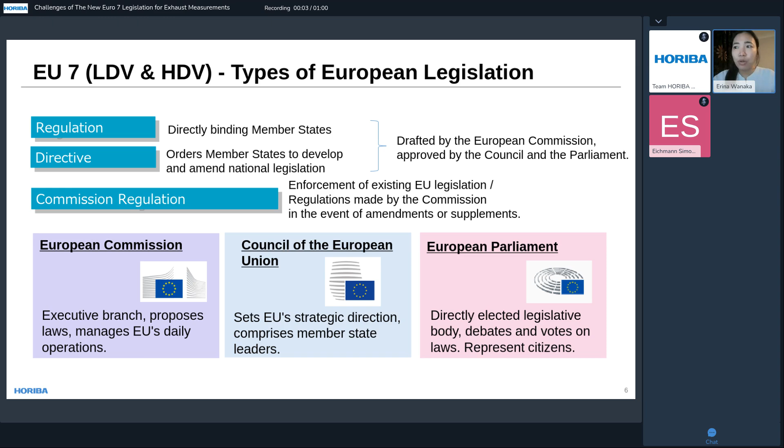So before we get into the actual contents, I'm going to talk about the Euro 7 overview. Before we get into the actual details of Euro 7, I'd like to quickly show you the big picture of how the EU legislation works. So EU 7 is shaped by three main EU bodies, one of which is the European Commission, who's there to lead the whole process. It drafts the proposal and drives the work forward. Then the proposal is discussed by the European Parliament and the Council, who introduce their positions before the final regulation is agreed. So this slide is basically to set the scene, to understand who's involved and how Euro 7 becomes a law.

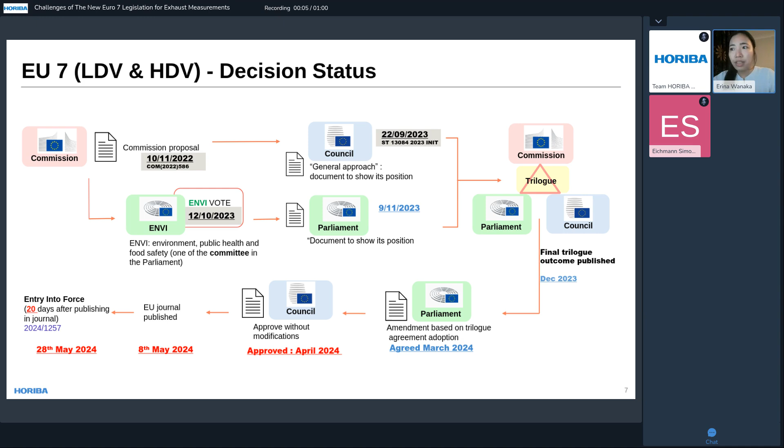So this slide summarizes the Euro 7 decision timeline. The proposal was first issued by the Commission in 2022. Then that was discussed in the Council and the Parliament during 2023. Later in 2023, that got passed through to a trilogue where the three main institutions came together at one table to reach an agreement. Finally, the text was published in the official journal on the 8th of May, 2024. 20 days later was the entry into force date on the 28th of May. So the key point here is that Euro 7 is now legally in force and the framework is fixed, meaning the direction and overall timeline was set. The details and test procedures will be defined at a later stage, but at that point, the framework has been set.

So what happened after that, based on the official journal of 2024? I'm going to start off with the facts first to set the baseline, and then move on to what that actually means in practice. Since the adoption of this official journal in 2024, the first set of milestones came in September 2025. This first set of implementing regulations was 2025/1706 and 2025/1707. They were published to cover the exhaust emissions, OBFCM, and OBM, both including the emission limits and test procedure for light duty.

And then the next phase, covering battery durability, brake dust, tire abrasions, and low temperature ranges for BEV, is expected around the second quarter of 2026. Then Euro 7 will apply to new vehicle types from November 2026, and a year later to all new vehicles from 2027. For tires, it's coming out at a later timing, starting to be applicable from 2028.

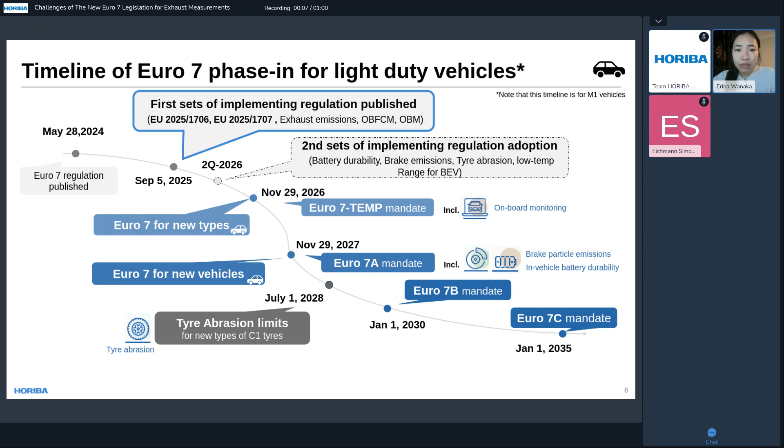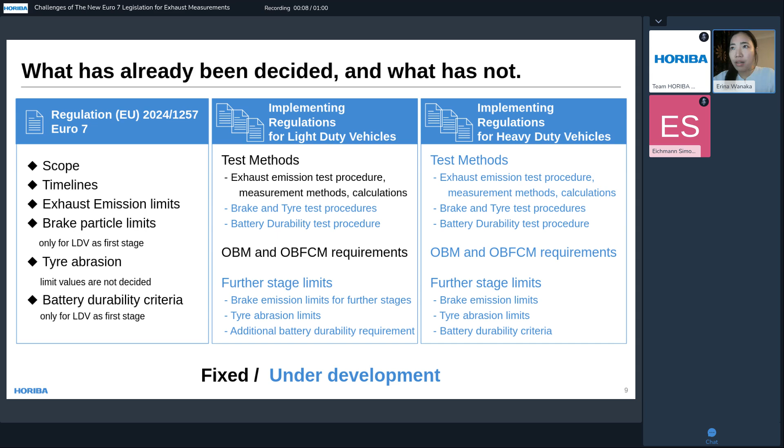So in terms of context, what has already been decided and what's still under discussion - the black parts are the ones that's already fixed and are in the first set of implementing acts, and the blue parts are still under development. For light duty, the brakes, tires, and battery durability are still being discussed, called the second phase. For heavy duty, most of the contents are also still going to be discussed.

So I have borrowed this slide from the latest AGVES meeting, which shows you the Euro 7 light duty transposition activities from the UN regulations. It basically maps the Euro 7 light duty requirements to the relevant UN ECE regulations where they're being implemented. For light duty, many of the key elements are already progressing, and you can see which requirements are linked to which UN regulations, like 154, 168, and 177.

So these corresponding UN regulations were part of the package that got passed through to GRPE in October, and now is expected to be voted at WP29 in March 2026, for that to be finally adopted and then referred to by Euro 7.

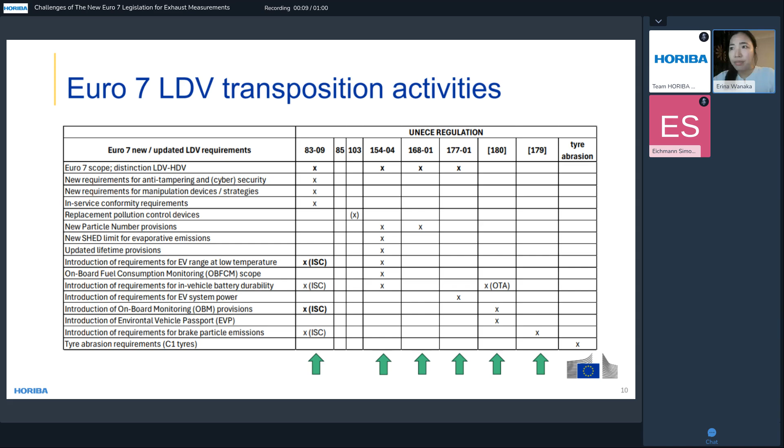So that was the overview of light duty so far, and the timeline of heavy duty currently looks like this. The first set of implementing regulation will be adopted around the start of the light duty type approval testing, which is on November 2026. Then the second set will be coming in before the application date starts for heavy duty, which is on the 29th of May 2028.

A year later, following a similar trend as light duty, will be the new vehicles, and similarly, the tire abrasion limit for C3 tires is expected to start around 2032.

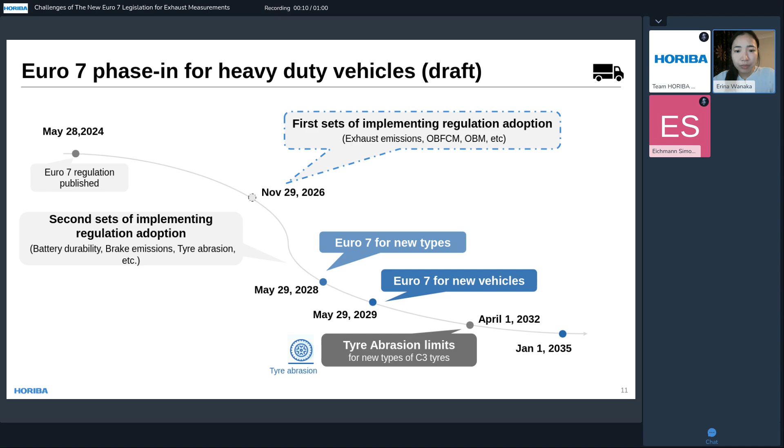In terms of the requirements for heavy duty, what we know so far is that the heavy duty emission measurement system will be referred to UNR 49. But the new requirements, which I'm going to talk about later, like NMOG and N2O, will also be added to UNR 49, and we expect this to be set around November 2026. Then they will move on to the second phase, but we'll discuss the details in later slides as we find out more.

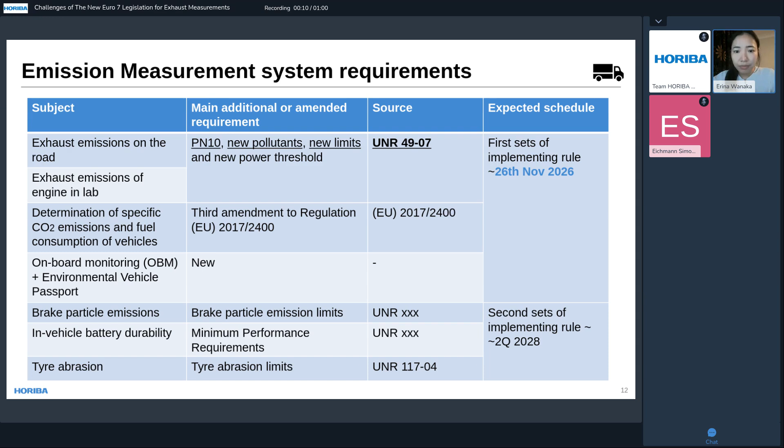So that is it for the overview. I'm now going to move on to the light-duty vehicles requirements, starting off with the Euro 7 exhaust emission limits.

As you can see, most of the numbers here are pretty much the same as in Euro 6E, except for the particulate number limit - PN10 is going to be regulated instead of PN23. Additionally, under Euro 7, all gasoline vehicles must meet the PM and PN limit, which was previously only applicable for direct injection positive ignition engines.

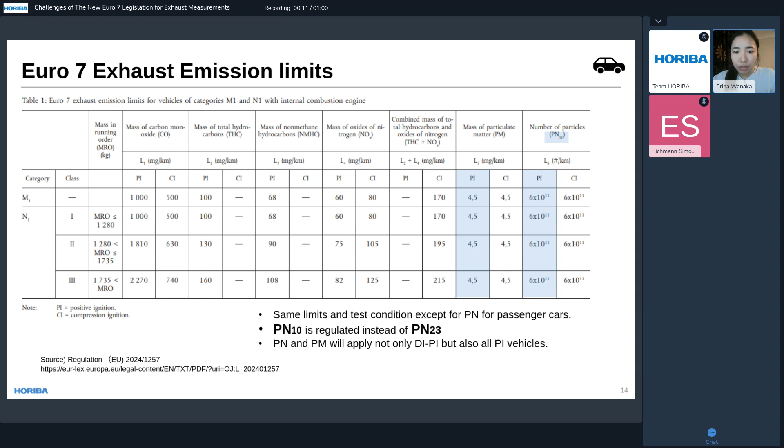So that's the laboratory. Now what is the situation in the RDE? I'm going to use the pointer here. So what it says in the regulation at the moment is to refer to Regulation 168. What it says in Regulation 168 is the NOx and PN limits would look pretty much the same as Euro 6E. However, there are still not yet specified limits for CO, THC, and THC plus NOx.

As a result, we are seeing different interpretations from the Commission and some of the OEMs. The Commission's view is that if it says 'not yet specified,' the limit will be defined at a later stage, while some OEMs interpret this as meaning there is no immediate obligation to measure. Our understanding is that NOx and PN will be carried over from Euro 6E.

Whereas CO and THC is where further clarification is still expected. However, in parallel, we understand that compared to when light-duty RDE was first introduced in 2009-2010, today's vehicles are far more hybridized. Because of this, the Commission has raised concerns about potentially elevated levels of THC, and they have already started doing some background testing.

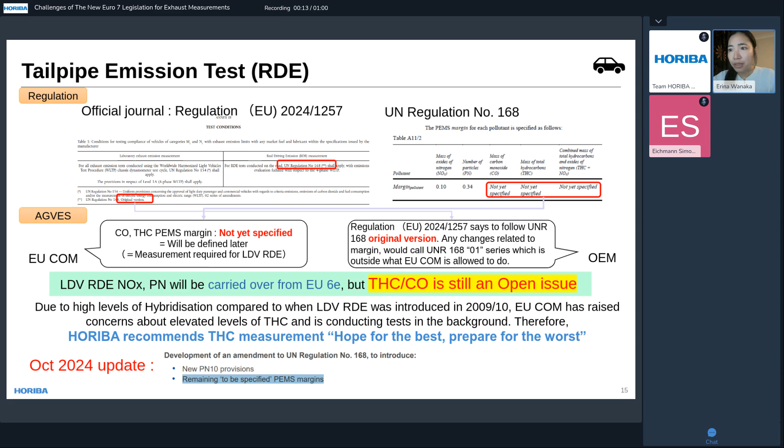So while the legislation is still evolving, our message here is that we highly recommend starting to build the actual evidence now. We'll of course keep you updated on how things develop, but we encourage that OEMs should be able to monitor their CO and THC data, so you can be ready to respond quickly once the limits and the compliance approach are finalized.

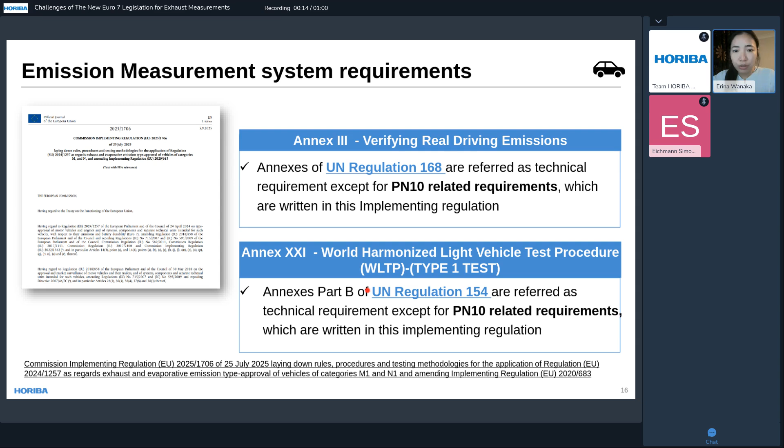So we have gone through the limits. Where can we find the test procedures? At the moment, the real world driving emissions requirements are currently written under Regulation 168. The laboratory testing is under 154, with the PN requirements currently written under the EU implementing regulations. However, the plan is to write this specification into UN 168 and 154, so that the European regulations only have to refer to the UN regulations.

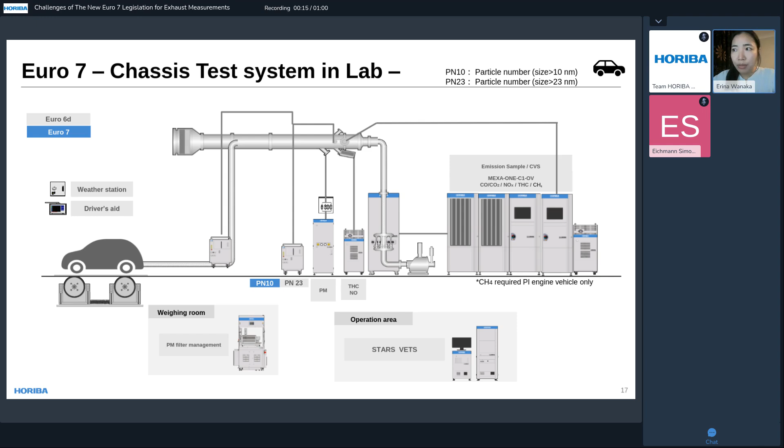Then moving on to what that test system looks like in the laboratory. This slide shows you the changes of the exhaust emission test system for Euro 7. As you can see in the center, the PN10 devices should be added for Euro 7, but other items would remain pretty much similar to what we already had for Euro 6E. Simone, after that, we'll be discussing the technical details on this part.

Also, what that also means for RDE is that we don't expect to see any changes regarding the gaseous emission limit, which is following Regulation 168. But regarding the PN limit, a new device to measure that is also required. Again, Simone will be talking about the details in her slides.

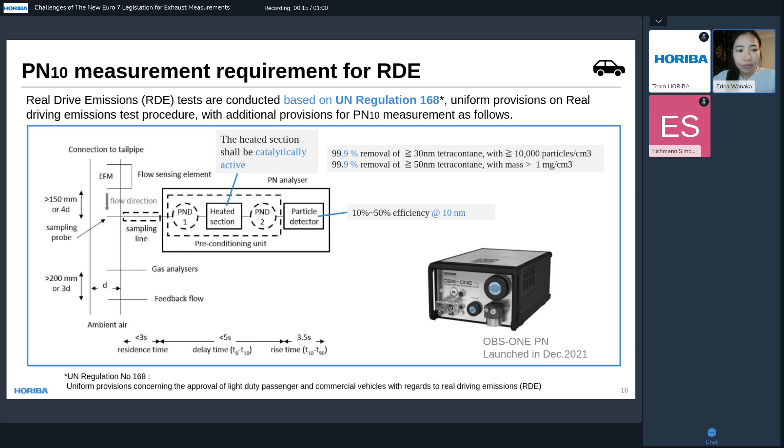So far, we have taken a look at the limit and the test procedure. Building on from that, we'd like to move on to the underlying principles. Hopefully this is going to be leading on to some good news.

As mentioned earlier, the Euro 7 RDE method refers to Regulation 168 as the basis of the measurement. Under this Regulation 168, a list of standard analyzers is described. At the same time, Regulation 168 also allows the use of alternative analyzers, provided that they demonstrate equivalent or better performance and are approved by the testing authority. With that context, following the necessary work, I'm very pleased to share that the Vehicle Certification Agency has approved our MEXAcube as an alternative analyzer for light-duty certification testing, giving you an additional compliance option for RDE measurements.

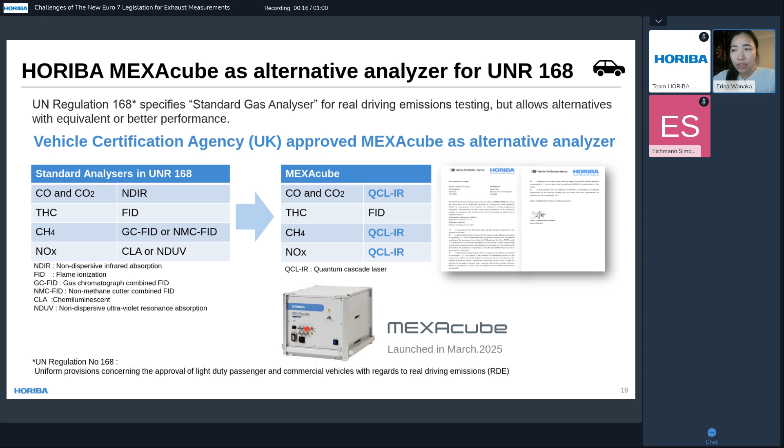Okay, so that was the first part, or first set of implementing regulation released in September 2025. There is another set of implementing regulation that's been released that talks about the OBM requirement. So OBM is trip-based: you start the propulsion system, you begin the OBM trip, switch it off, the trip ends.

After that point, the vehicle updates the monitoring status of NOx and also for PM. If either of them reaches the error status, the driver warning system has to alert the driver. At that same end-of-trip moment, the vehicle also creates the data record—the distance-based NOx for that trip, plus supporting parameters like energy or fuel use or battery state of charge. It also generates a hash value so that the record can later be checked for integrity.

Then this record will be made available in two ways: it is sent over the air when connectivity is allowed, and it also must be accessible through the OBD port. So the message here is that Euro 7 adds trip-by-trip evidence that the emission control can stay healthy in real use, not just in the laboratory.

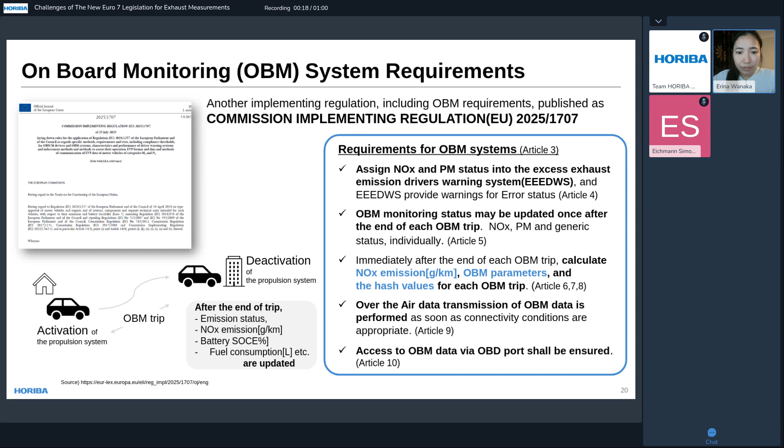So how is this OBM checked? During in-service monitoring, or in-service conformity, the NOx value reported by OBM is compared against the reference NOx measured by the approved emission system. Beyond this individual test, overall performance is also judged through the OBM dataset submitted for market surveillance, to see how the system behaves in real use.

Importantly, the regulation also includes a value limit: the OBM NOx value must not be more than 30% below the measured test value. So technically, this requirement is driving more OBM development work, and at the moment we're seeing growing interest in analyzers such as MEXAcube to calibrate and validate the OBM system. This is also an area where Simone is going to be talking to you about the details.

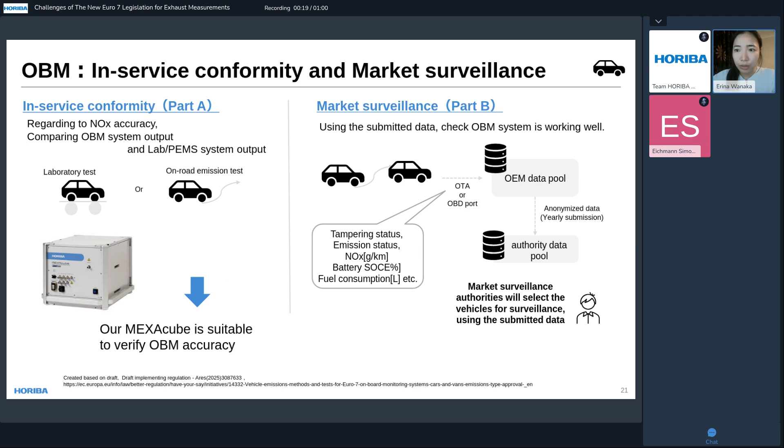Okay, so that covers the first phase of light duty. I'm going to move on to the second phase from here. One of the new requirements here is the brake particle emissions.

At this stage, only a particle mass emission has been defined. This is going to be reviewed over time, with the revised table expected to arrive around 2030 and then also 2035. But the final limit for light duty is fixed for all types of vehicles as 3 milligrams per kilometer per vehicle.

In terms of the test procedure, it is based on UN GTR at the moment, but a transition to UNR 179 is expected. The regulation itself also defines the measurement method for all of the indicators, that's PM10, PM2.5, and TPN, which all require to be reported.

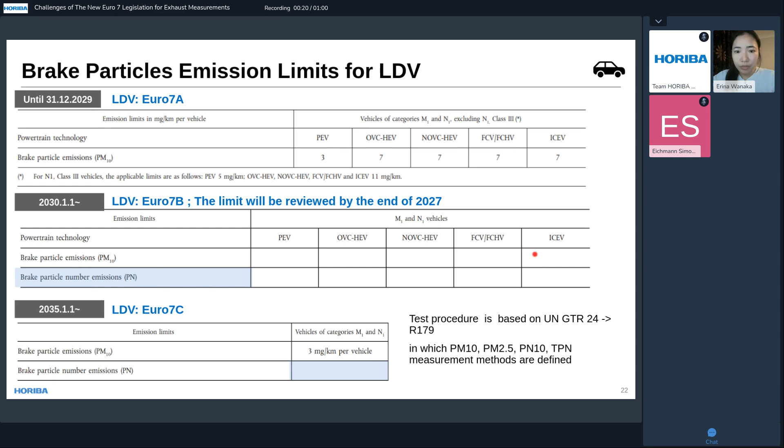For the tire versions, at this stage, the limit table looks blank and has not been finalized quite yet. In terms of the test method, that's also currently being looked at, at the UN level. But yes, the intention is to use that UN regulation once it's been enforced.

As for the timing, C1 tires, the passenger car vehicles, are applicable from 2028. C2 tires, the commercial vehicle tires, from 2030. C3, the heavy-duty vehicles, from 2032.

Moving on to battery durability, Euro 7 introduces a new durability requirement. At this stage, what has been decided is the durability requirement for light duty covering up to 8 years or 160,000 kilometers. In terms of the assessment method, the evaluation approach is defined under UN Global Technical Regulation 22, where again they are discussing transitioning that over to the UN regulations.

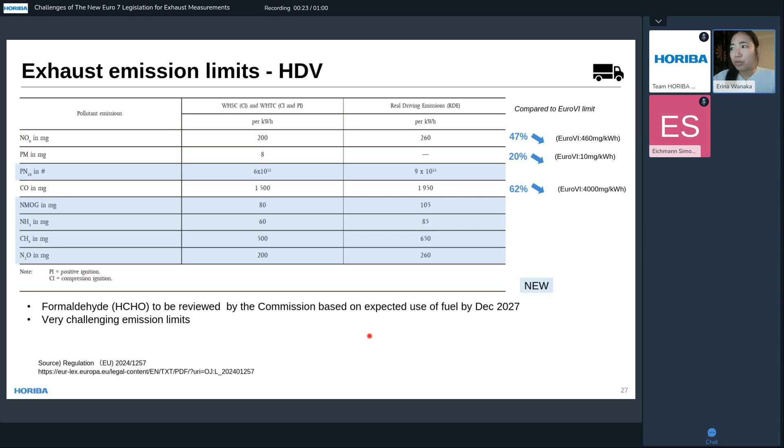It also adds NMOG, ammonia, methane, and nitrous oxide. Formaldehyde, on the other hand, the value is not yet given, but the Commission is currently under review to decide whether to set a specific limit for formaldehyde, and that's going to be decided before the end of December 2027.

One of the new components, as I've shown you in the previous slide, is the NMOG. There is a definition in the Euro 7 language, but the calculation formula is not finalized yet.

However, there are two candidate formulas. One of which is the formula used by the US EPA, and it uses the alcohol and aldehyde values that are sampled by the impinger or cartridge, and then measured by gas chromatography.

Another possible formula is the EU original one. This method uses the formaldehyde values and the values related to the fuel property.

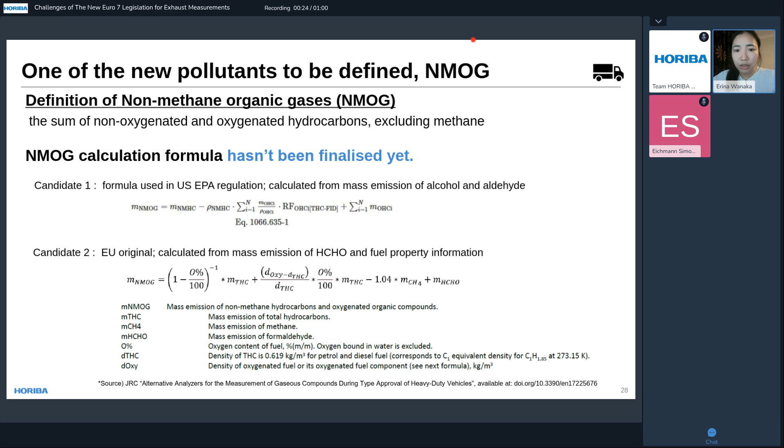So the measuring principles - you may be looking at this slide thinking it's very different from light duty, but the main message we want to get across today is that QCLIR technology is a compliant method in the regulation, and we are doing the final work to make that 100%.

As mentioned earlier, the emission measurement method will follow the UNR regulation 49 series, and the amended regulation to include this QCLIR technology has been voted on in WP 29 in November 2025. In this draft, QCLIR is included.

However, there are some conditions for alternative analyzers. For example, this has to be type examined by the Metrological Institute, technical service, or type approval authority, and it will also have to be compliant with CEN. We are planning to have that ready by the end of this year.

It's not a topic today, but we also have the same text in Regulation 96 for non-road, for those of you who are interested in non-road. So we also have that assessed and appraised for non-road as well by the end of this year.

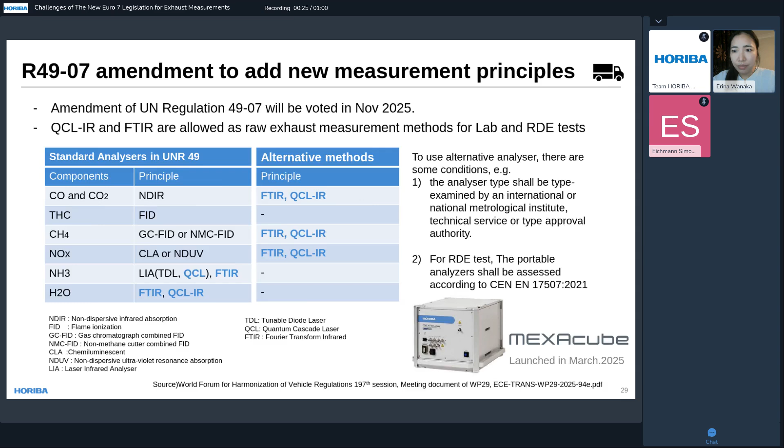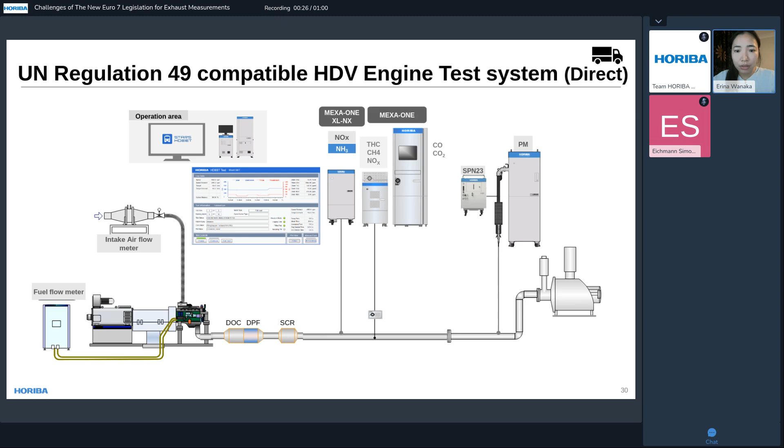What that test system looks like in the test schematics - this is what it used to look like in Regulation 49, the current version. One example of Euro 7 measurement would look like this, with N2O measurement, formaldehyde, and SPN10 as new components.

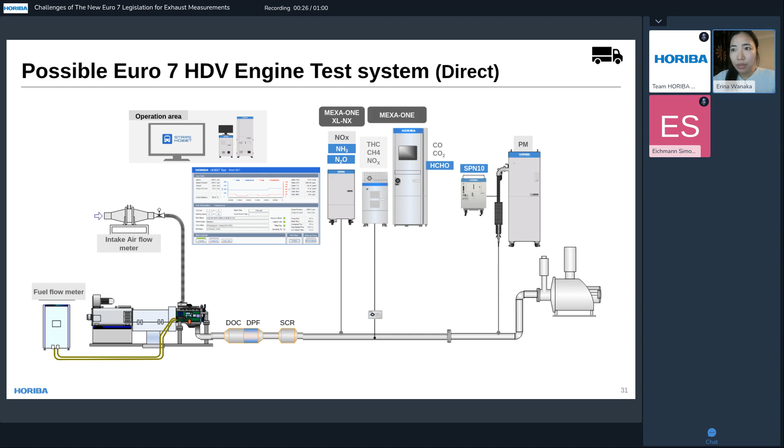For heavy-duty brakes, it is expected to have the limit set by the end of 2027, looking at how things go with also the light-duty as well.

There was an interesting discussion I'd like to talk to you about in the latest AGVES advisory group on vehicle emission standard discussions. It highlighted a mismatch between the vehicle level limit and the aftermarket reality. Brakes are typically replaced by axle, and rarely would the front and rear be replaced at the same time, whereas the Euro 7 limit currently defines the brake emission limit at a whole vehicle level.

So it was discussed that this created technical uncertainty for the aftermarket, including a significant increase in the brake family, high test burden, and wide variety of original equipment front and rear emission ratios. To address this, a proposal was discussed to ensure any combination of original equipment and aftermarket brake components would still have to be compliant with the vehicle level brake emission limits, but the details are still to be discussed in upcoming meetings.

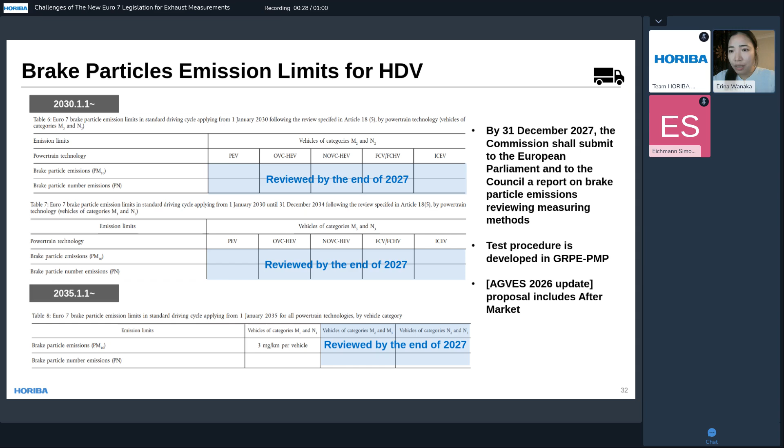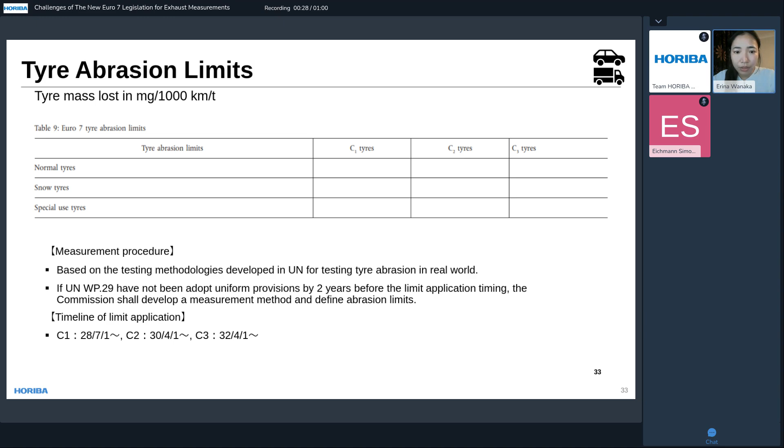The tire abrasion limit situation is still behind light duty, whereas in heavy duty it's starting around 2032. The technical details of battery durability will also be defined later.

Looking ahead to the new Euro 7 elements - battery durability, brake emissions, and tire abrasion - I'm going to talk to you a little bit about our solutions. The evaluation method is coming very close to being finalized for light duty in the UN regulations. For battery durability, the challenge is running repeated drive and charge cycles on the chassis dynamometer without consuming excessive engineering time. This is where our automated robot could potentially help, by running the battery consumption sequence with consistency and efficiency.

For brake emissions, Horiba Germany already has a compliant test facility, so we can support you with some contract testing as well, if that would be useful. Tire abrasion is still under active development, and we are also involved in both the regulatory drafting and the testing activities. I won't go into the technical details today, but we are more than happy to support whatever need, whatever questions or requirements you've got, and we can cover that in later discussions.

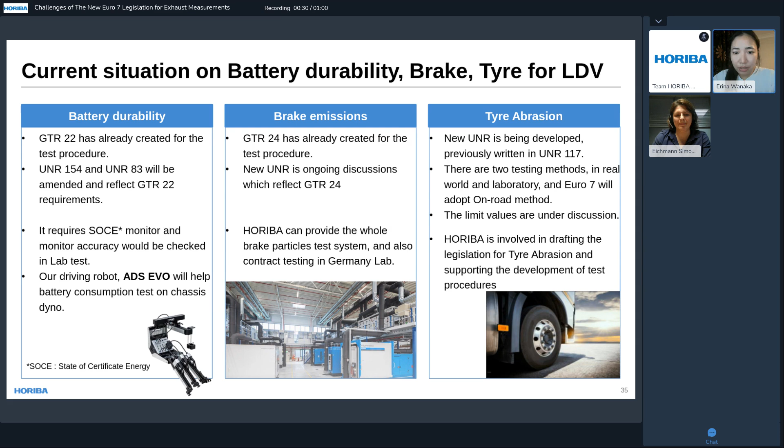So this will be my final slide for the day. To wrap up, for light duty, the first Euro 7 implementing package is already published.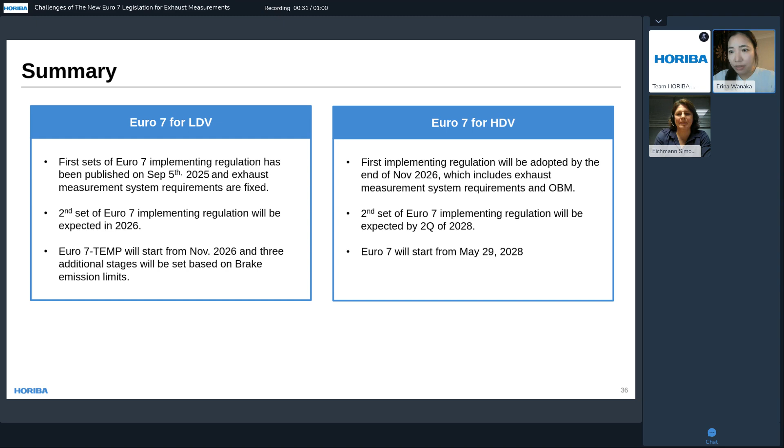For heavy duty, the detailed implementing rules are still being developed. The base regulation requires the Commission to adopt these implementing acts by 29th of November 2026. Then it will be applicable for Euro 7 from the 29th of May 2028. So with that context, I'm going to hand over to Simone to share some practical insights on the technical side.

Thank you very much, Erina, for this really broad and deep overview of the new requirements of the upcoming Euro 7 regulation. In the next part, I will talk about the solutions HORIBA offers to help you fulfill these requirements. Here on this table, I summarized the components which are regulated currently in the Euro 6e regulation for light duty and heavy duty, and compared them with the components which will be regulated in Euro 7, also for light and heavy duty. When we compare this to the regulation, what is new?

Ammonia needs to be measured as mass. N2O was added. Basically, THC and non-methane hydrocarbons were replaced by NMOG and CH4, and as Erina said, formaldehyde will be reviewed again in 2027, but will be needed anyhow for the calculation of NMOG, meaning non-methane organic gases. When we look at particle measurement, PN23 was replaced by PN10, so smaller particles will also need to be monitored.

Okay, what are our solutions for that? Of course, you can measure the...

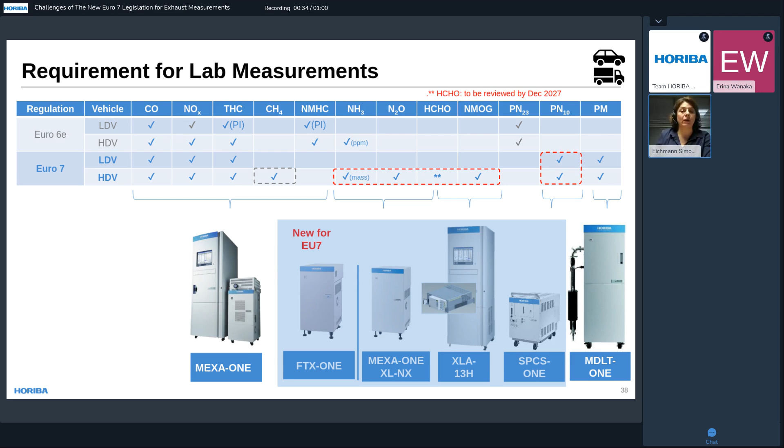For particle measurements, we upgraded our SPCS-ONE particle counter to measure also smaller particles. I would like to go now a little bit in detail on the specifications of the analyzer, basically starting with particle measurement. As I said, we have upgraded our SPCS-ONE to measure also smaller particles, starting from a particle size of 10 nanometers. The measurement principle is still a condensation particle counter.

We use a hot catalytic stripper for volatile particle removal with an efficiency of more than 99.9%. The counting efficiency is bigger than 90% for particle sizes of 15 nanometers and higher. You can use the unit for ambient conditions of 5 to 30 degrees Celsius for standard configuration. If you use an additional cooling unit, you can even go up to 45 degrees Celsius, and for altitude use, up to 2000 meters.

We have several options available. First, single unit - we still have available a PN23 unit, but you can also have a single PN10 unit. It's also possible to upgrade a current particle counter to PN10, so you don't have to buy complete new equipment. In addition, we offer a dual unit, which includes 2 particle counters, one for particle sizes from 10 nanometers and one for particle sizes from 23 nanometers. Both measurements are done simultaneously.

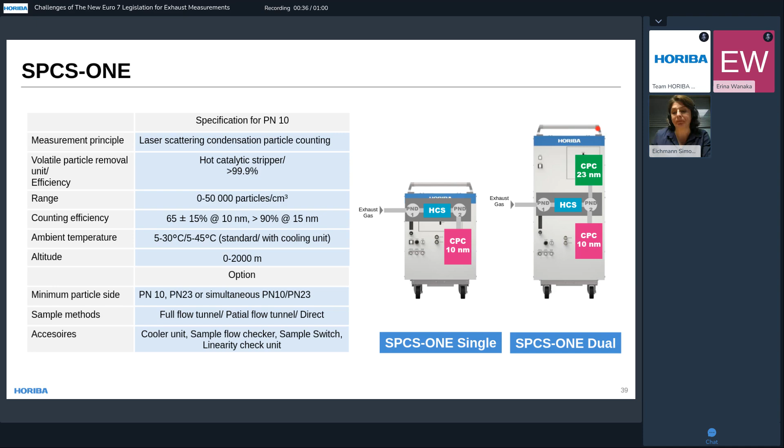Okay, now I would like to switch to the gas components, but before that, I want to highlight a little bit the difference between both technologies and the pros and cons, to help you find the proper technology. In principle, QCL and FTIR are based on the same physical background - they both use the absorption of infrared light from the different gas components, and the wavelength of the absorbed light is unique for a certain species. That means you can detect one component selectively in a multi-component gas mixture. The amount of absorption is related to the concentration, so you can get a concentration value out of that.

What is now the difference between both technologies? I would like to start with the Fourier transform infrared technology, FTIR. This technology is really able to detect a very broad wavelength range with a single setup, and this allows the detection of several molecules like CO, N2O, CO2 with one single setup. But you also see that you have some overlap between the signals, which can be partly compensated, but typically you have to consider some residual interferences of 1 to 2 ppm, depending also on the component.

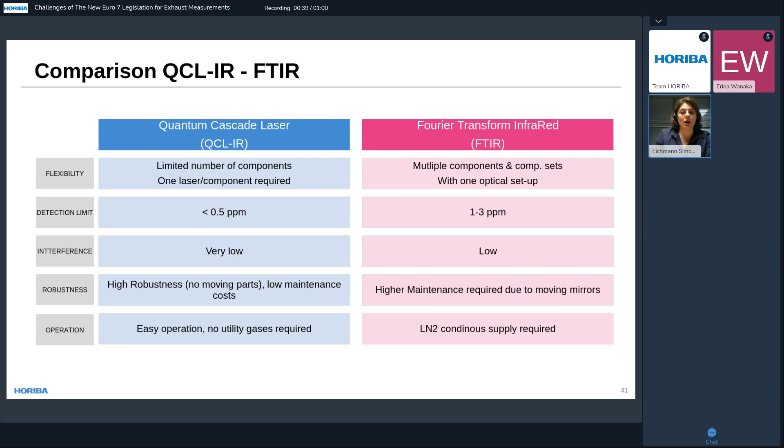Okay, now I would like to start to introduce you to our FTIR-based analyzer, the FTX-ONE family. We have basically 3 options. One is the FTX-ONE-CS, the compact version, which includes an FTIR with the possibility to measure simultaneously up to 28 components. We have the possibility to add up to 6 component sets for different fuels. The analyzer operates at 5 Hertz and is compliant to the UNR 49 stage 5 and the GTR 15 regulation for ammonia.

In addition, we have the FTX-ONE-RS available. That also includes an oxygen and a THC measurement with an FID. Both the FTX-ONE-CS and the FTX-ONE-RS are for direct measurements. And in addition, we have the FTX-ONE-CL available. It's a diluted analyzer with compliance to EPA 1065 and 1066.

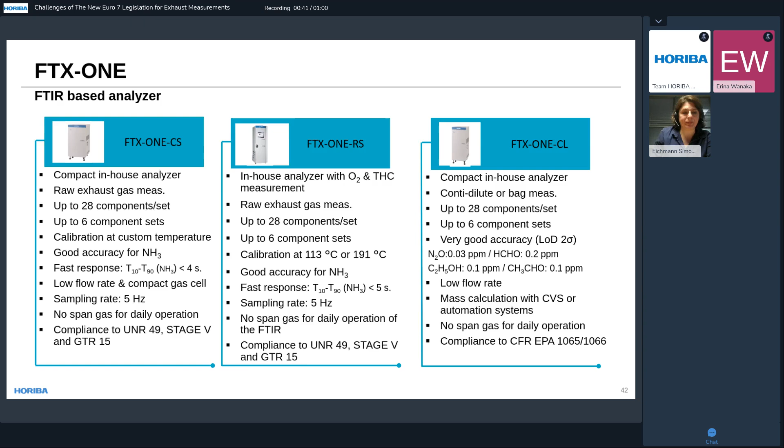Okay, now I would like to switch to our QCL-IR-based analyzer. One unit is the MEXA-ONE XL-NX, which measures beside NO, NO2, also N2O and ammonia. You can use it for raw as well as continuous diluted measurement. It has a time resolution of 10 Hertz and the detection limit of 0.2% full scale.

which means between 0.2 and 0.4 ppm, depending on the component. It is developed for temperatures of 5 to 40 degrees Celsius and compliant to the EPA 1065 regulation, the UNR GTR 15 for ammonia, NO2 and N2O, and the UNR 49 regulation. Currently, we are ready for ammonia. For additional components, we need to wait till the regulation is finalized and we have the type approval, which is required. It's also compliant to Chinese regulation as well as stage 5 for non-road mobile machineries.

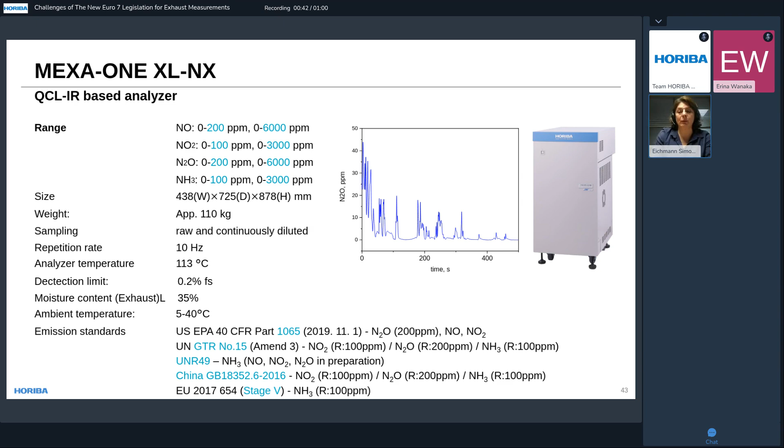Okay, for formaldehyde, we have also a QCL-IR-based analyzer available. That's a 19-inch rack analyzer for implementation in MEXA-ONE. We have ranges there of 20 and 100 ppm, also with a time resolution of 10 Hertz and with a detection limit of up to 0.2 ppm.

Okay, this was actually a lab analyzer. Finally, before I switch to the RDE analyzer, I would like to talk about ammonia measurement. You know that ammonia will now be regulated not only as ppm but also on a mass base measurement, and this means that the ammonia measurement has to be aligned with the flow measurement. We still hear some concerns from our customers, and therefore I would like to spend one slide on this topic.

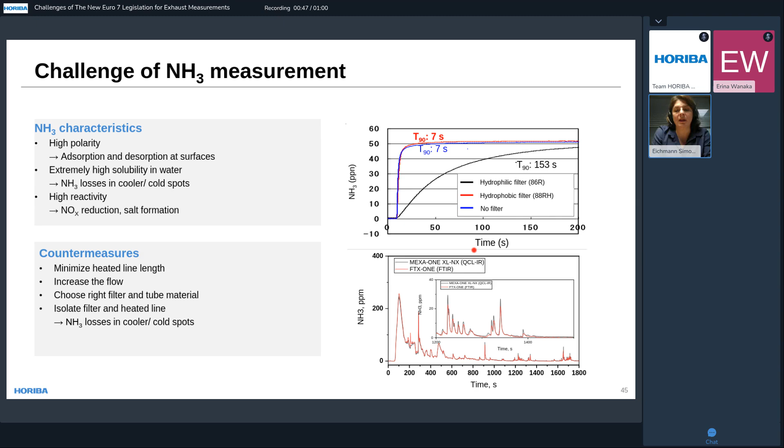Here you see a comparison for ammonia measurements, which we performed once with a QCL-based analyzer, the MEXA-ONE XL-NX, and on the other side with an FTIR-based analyzer. So we have different analyzers, different sample methods, and you really see that we get very good agreement between the analyzers. The peaks are really very well resolved, and you get very good measurement results.

Okay, as I said, I will switch now to our solutions for RDE. Here I have again a summary of the components which are regulated for Euro 6E and Euro 7 for light duty as well as for heavy duty.

Again, for light duty, there were not so many changes. What's new for gaseous components is that THC and non-methane hydrocarbons were replaced by NMOG and CH4, and ammonia and N2O have to be measured. Formaldehyde will be reviewed again, but needs to be measured as part of NMOG. In addition, PN23 was replaced by PN10, so the challenges are similar compared to the laboratory measurements.

Okay, what analyzers can you now use for light duty, where there are not so many changes? You can, of course, still use the OBS1GS and the OBS1MA. Then we have already launched in 2021 our OBS1XL for ammonia and N2O measurement. That was more at this time, or more planned for R&D measurement, to support you to prepare for the Euro 7 regulation, to prepare your research and development.

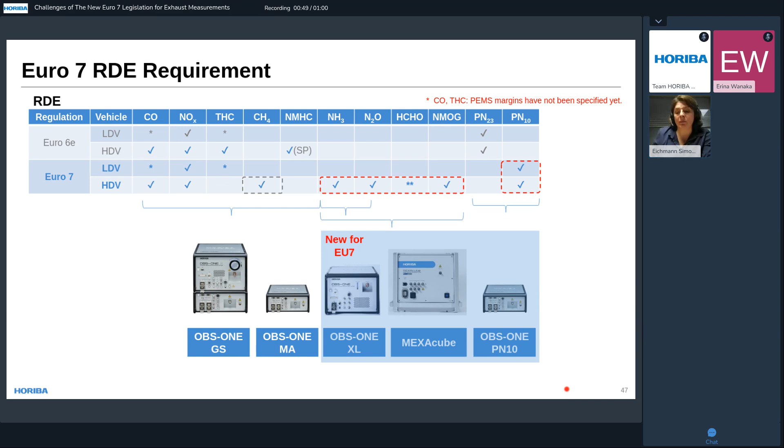And now we launched last year our MEXAcube, which offers the measurement of all components, including NH3 and N2O, and also shows compliance to current regulation, where we are still waiting for the regulation to be finalized. For the particle measurement, we have our PN10 unit, so we modified our current PN unit.

Okay, I would like to start here again with the particle measurement. Also here, our new OBS-ONE particle measurement unit is based on laser scattering condensation particle counting. We also use a hot catalytic stripper. You can get here accuracies of ±10%, with drift smaller than 100 particles in 4 hours, and we have several heated lines available.

This PN unit can be used as a standalone unit, but we can also include it in an OBS-ONE GS or in our MEXAcube. Both are possible.

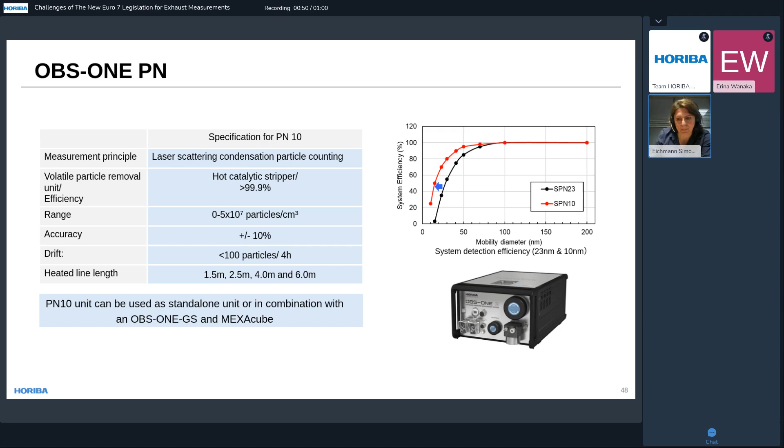Then to the OBS-ONE XL unit, as I said, this is more designed for R&D application, to prepare your engine for the upcoming regulation. It allows measurement of ammonia up to 1,500 ppm and N2O from 1 to 1,000 ppm, with a zero noise of 0.2% of full scale, so a few ppm.

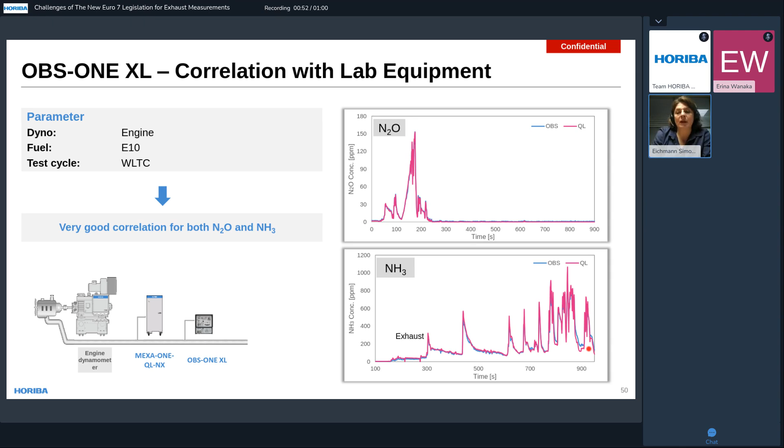Here are some measurements where we compared our OBS-ONE XL with the stationary system, the MEXA-ONE-QL-NX, which was at that time the predecessor of the MEXA-ONE-XL-NX. The other measurements were done at an engine dynamometer with a WLTC cycle. And when you look here at the measurement and compare the results from both units, you can see that there is really good agreement. Only very small deviations were found for NH3, but which did not have any impact on the final result.

Okay, finally, I want to highlight our MEXAcube, our new RDE analyzer, which was launched last year, which allows the measurement of basically all regulated components in this very compact analyzer unit. It allows the measurement of CO2, NO2, N2O, ammonia, formaldehyde and CH4. All these components will be measured with our unique IRLAM technology based on the QCL-IR technology. And we have also integrated in this unit an FID analyzer for measurement of total hydrocarbons.

Some specifications I want to highlight: we have a temperature range from minus 10 to plus 45 degrees Celsius and altitude of up to 3000 meters. We have a time resolution of 10 Hertz, and the unit can be used for water concentration of up to 24%.

Here you have some overview of the performance. So all specifications comply to the UNR 49 regulation as well as the UNR 168. As Erina already mentioned, the UNR 49 will adapt the QCL technology, and for light duty application, we have a VCA approval which shows equivalency to the UNR 168 regulation.

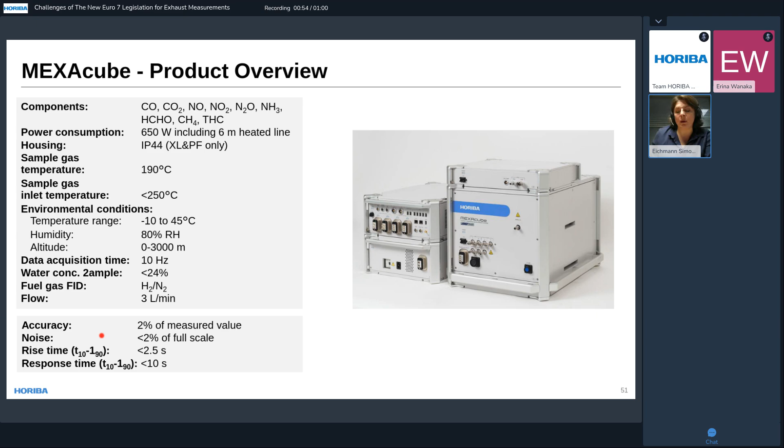Okay, here finally some examples for the performance. Here we can see some results from detection limit, where we compared the MEXAcube with our unique IRLAM technology to the OBS-ONE, which is based on NDIR technology, for CO. And you can really see that the detection limit is reduced by more than one order of magnitude. Here we have also some results from vibrational tests.

Where we change the frequency over a very broad range, simulating typically conditions which occur in heavy train wagons, we reached forces up to 2G, and what you do not see in the diagram is that we also had some peaks of 5G, and nevertheless we see no effect of the vibration on the concentration results.

In addition, we also did some measurements on a Belgian pavement where you also saw no effect. Here are some comparisons from measurements of CO from the MEXAcube compared with the OBS-ONE.

First, you see also at very low concentration, you have very good agreement. But when you look very exactly here on the results from MEXAcube shown in black, you see that slight changes are just better resolved, and you have also a better response time.

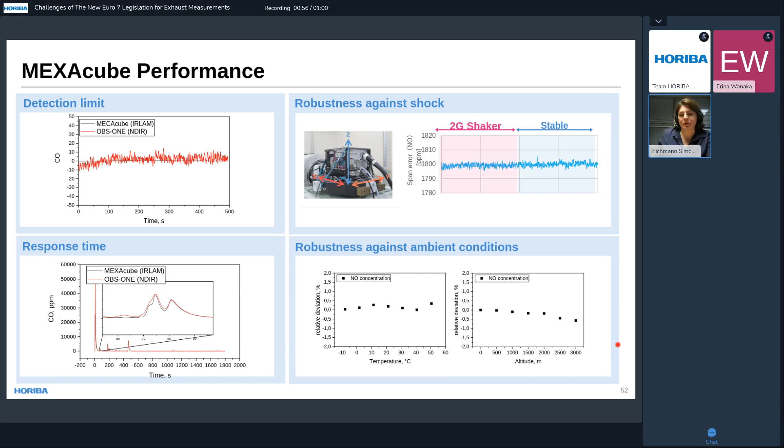Okay, now I'm already on my final slide. I want to highlight again that we will provide you with solutions for the new Euro 7 regulation. We have solutions for stationary analyzers and analyzers for RDE application, as we already mentioned. Nevertheless, we also give you full support for brake test, and we have also, of course, automation systems to complete your application.